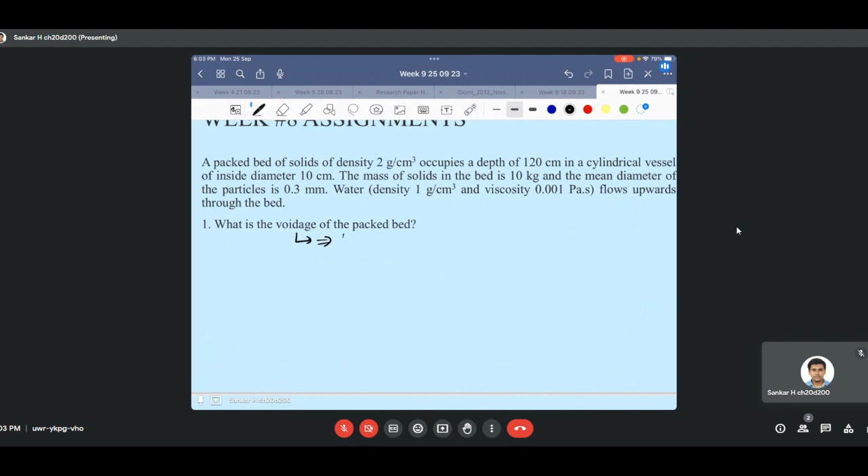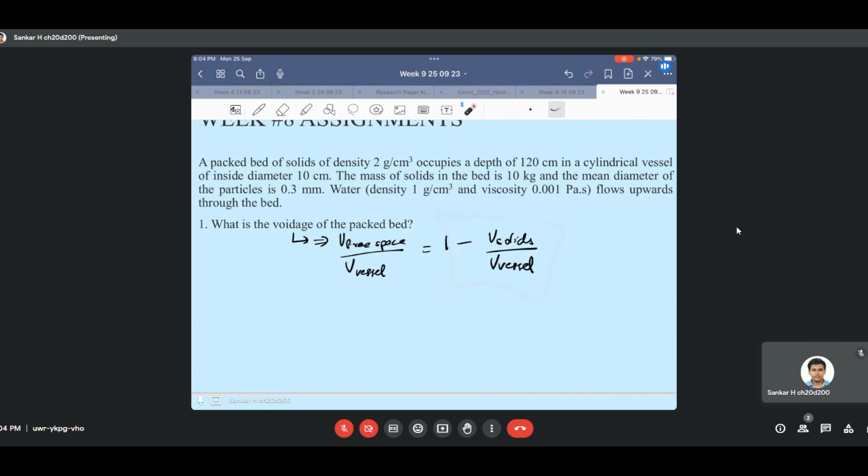The mass of solids in the bed is 10 kilogram and the mean diameter of the particles is 0.3 millimeter. Water flows upwards through the bed. What is the voidage of the packed bed? We need to understand what this term voidage means, and we know that it is the volume of free space divided by volume of the column or the vessel, and this is 1 minus the volume of solids by the volume of vessel. So we can find it using this simple formula what the voidage would be.

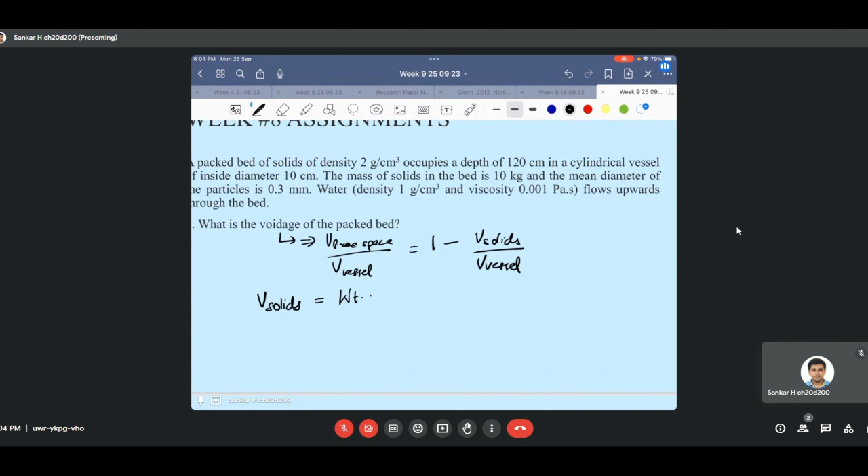And for finding the volume of solids, we have a simple formula which is given by the weight of solids to the density of solids. And the weight of solids is given as 10 kilogram, and the density of solids is given as 2 gram per centimeter cube, which is 2000 in SI units, kilogram per meter cube.

So let's take a look at the question. There is a packed bed and there are some solids in it, and these solids have a diameter of roughly 0.3 millimeter. These are in a vessel of diameter 10 centimeter at a depth of 120 centimeters, and we know that the fluid that comes out is water.

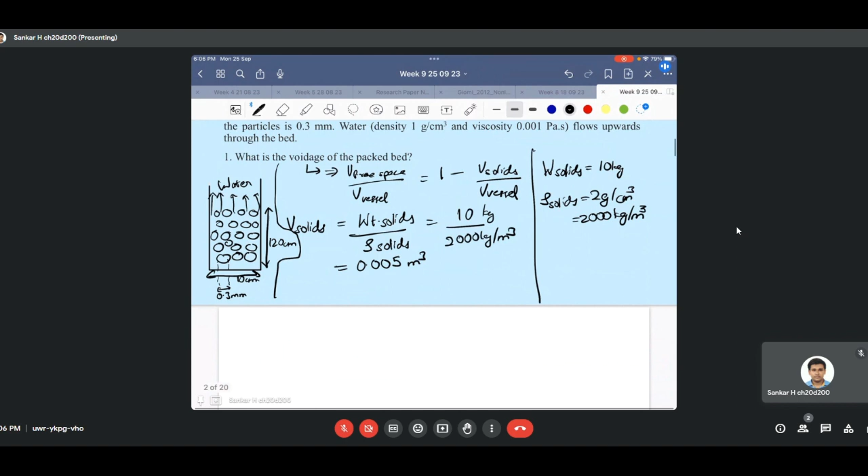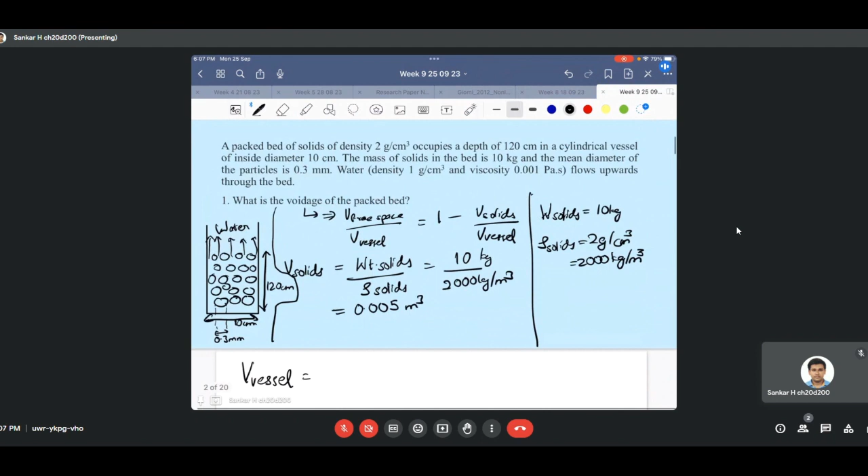Let's move on to the volume of the vessel. We know it is a cylindrical vessel as given in the question, so we can use the equation for calculation of the volume of a cylinder to find the volume of this vessel.

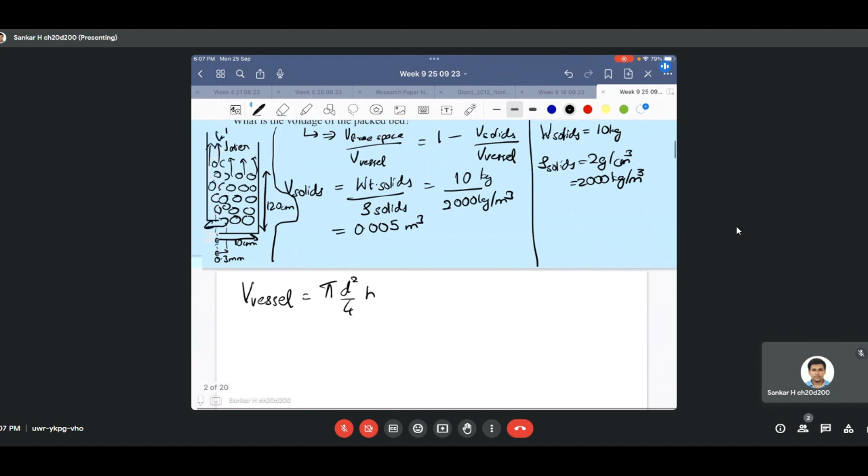The diameter of the vessel is given as 10 centimeters and the height as 120 centimeters. Converting to meters, that's 0.1 meter and 1.2 meter. Performing a simple calculation, pi times 0.1 squared by 4, times 1.2, we get the volume of the vessel.

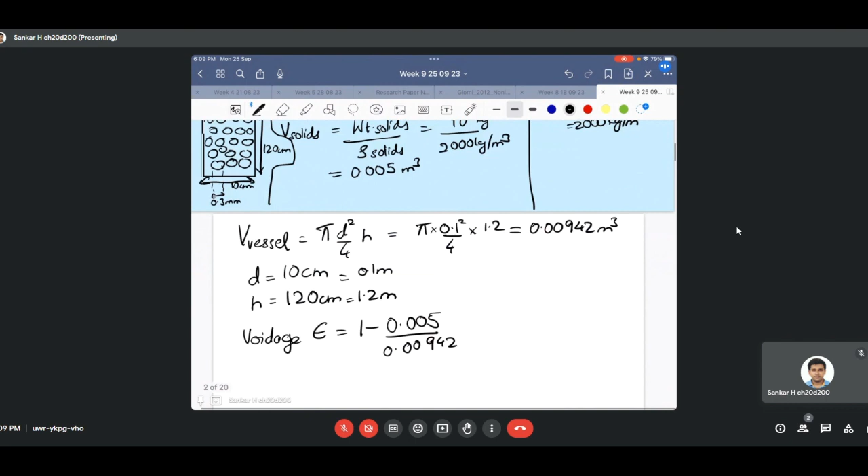We calculate the voidage, given by epsilon, as 1 minus 0.005 divided by 0.00942. It's just a substitution into the equation for epsilon, the voidage, and you get this as 0.47.

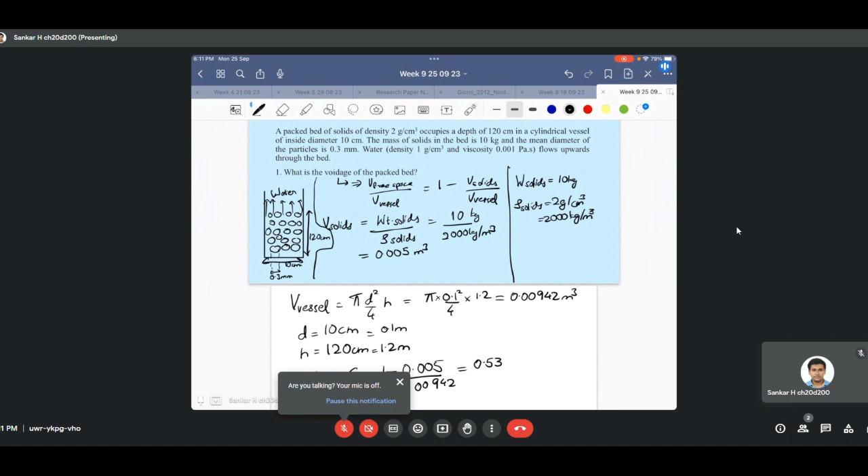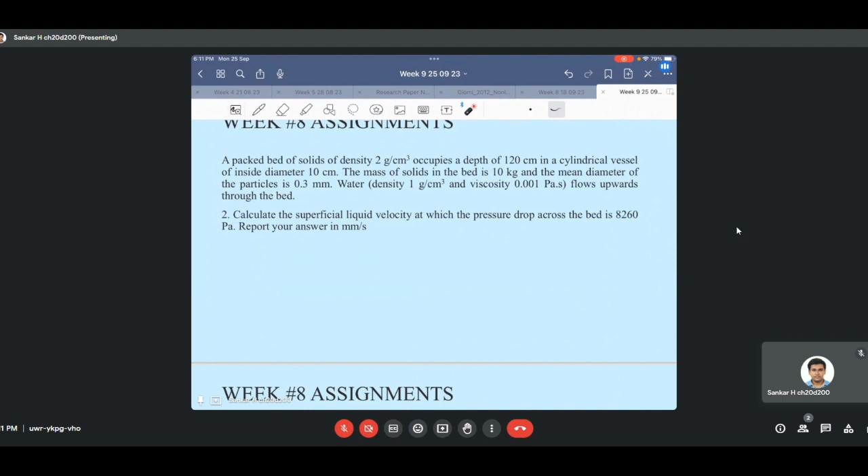Let's move on to the next question. The first part of the problem remains the same, with a packed bed of solids, and now we are required to calculate the superficial liquid velocity, where the pressure drop across the bed is 8260 Pascal.

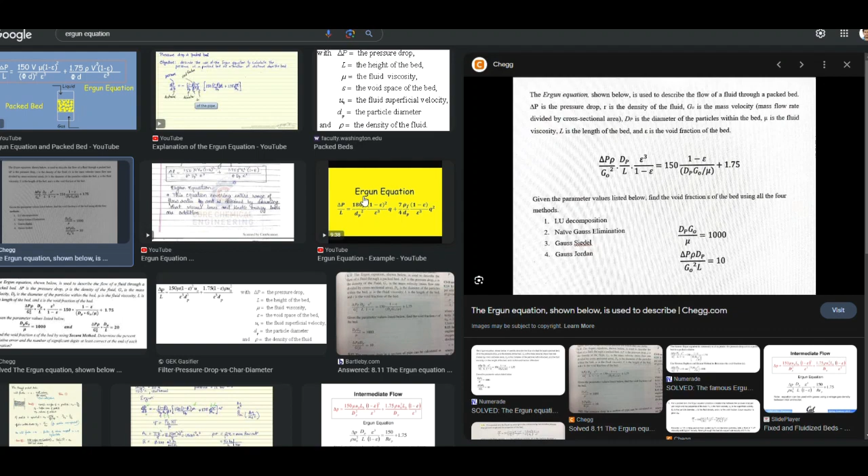For this we use the Ergun equation: delta P by L equals 150 mu times (1 minus epsilon) squared times V naught bar, divided by epsilon cubed times dp squared, plus 1.75 times (1 minus epsilon) times rho times V naught bar squared, divided by epsilon cubed times dp. This is known as the Ergun equation.

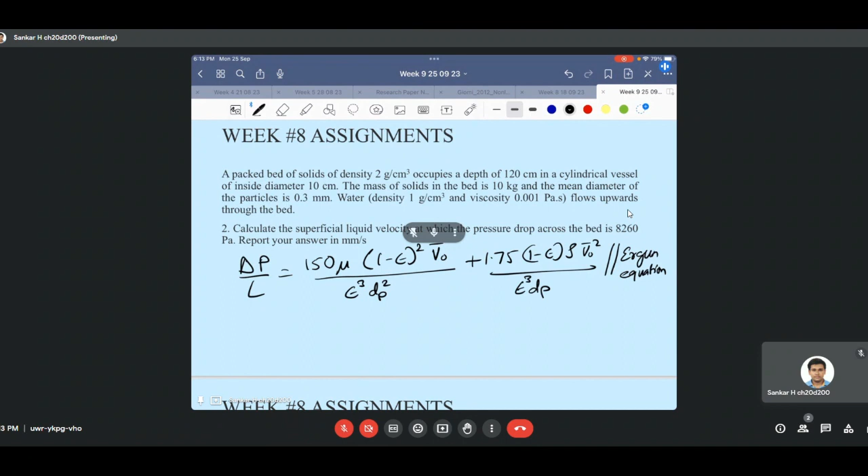I've noted it down here as well. This is a simple direct substitution of whatever we found till now. We just have to solve for V bar. The pressure drop across the bed is 8260, and L refers to the depth or height of the cylindrical vessel. Let's write everything down.

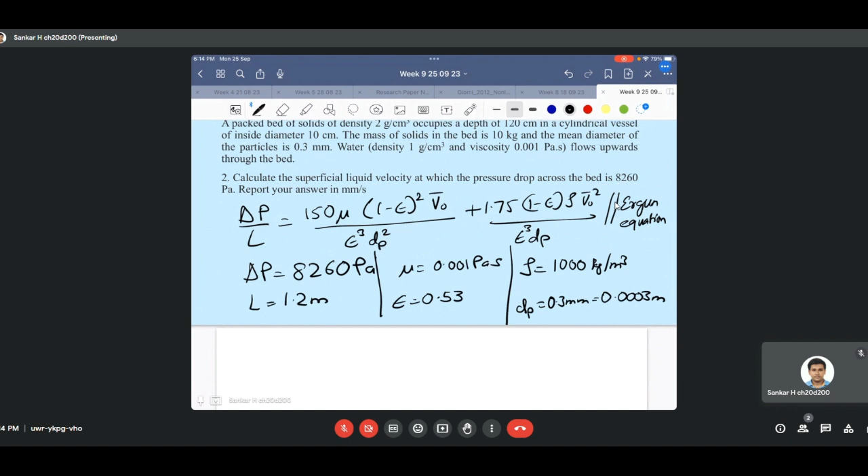Delta P is 8260 Pascal. L is the height, which is 1.2 meter. Viscosity of the fluid is 0.001 Pascal second. Epsilon we found to be 0.47. Density of the fluid is 1000 kilogram per meter cube since it is water. The diameter of the particles is 0.3 millimeters, which is 0.0003 meters. What we have to do is substitute here, which is done as follows.

I'll substitute along with the units so there's no confusion. 8260 Pascal, 1.2 meters, equals 150 times 10 to the minus 3 Pascal second, times (1 minus 0.47) squared, times V naught bar, divided by epsilon 0.47 cubed times dp 0.0003 squared, plus 1.75 times (1 minus 0.47) times 1000 kilogram per meter cube, times V naught bar squared, divided by epsilon cubed times dp.

Now we just have to solve this quadratic equation in terms of V naught bar, which I have defined as the superficial velocity.

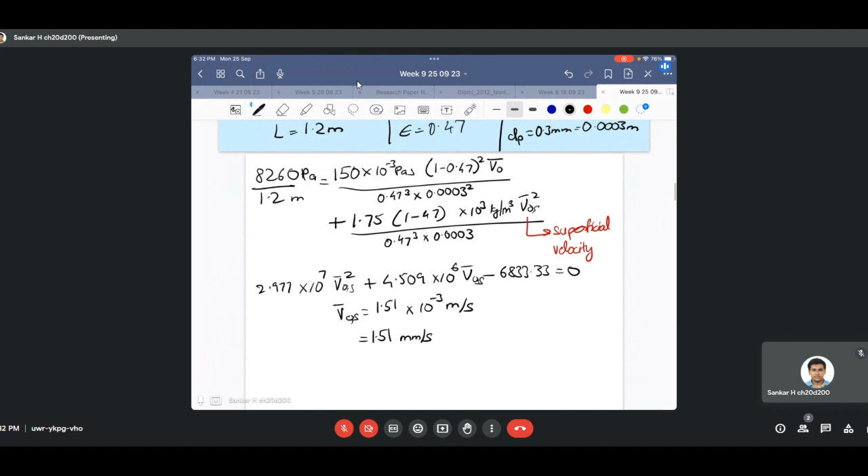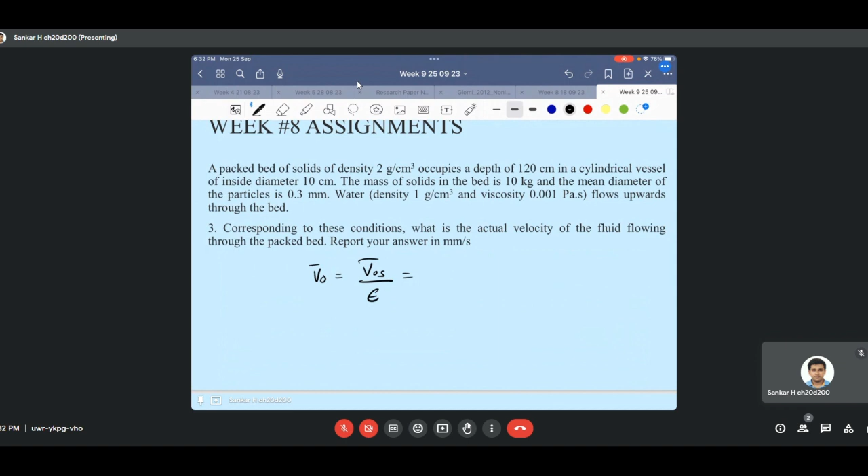The actual velocity, given by V naught, is equal to V naught S by epsilon, where epsilon is the voidage and V naught S is the superficial velocity, which is 1.51 millimeter per second, divided by 0.47. You can calculate this value, it will be 3.2 millimeter per second.

This will be the actual velocity. You should always know that the actual velocity will always be more than the superficial velocity, so this answer would be correct.

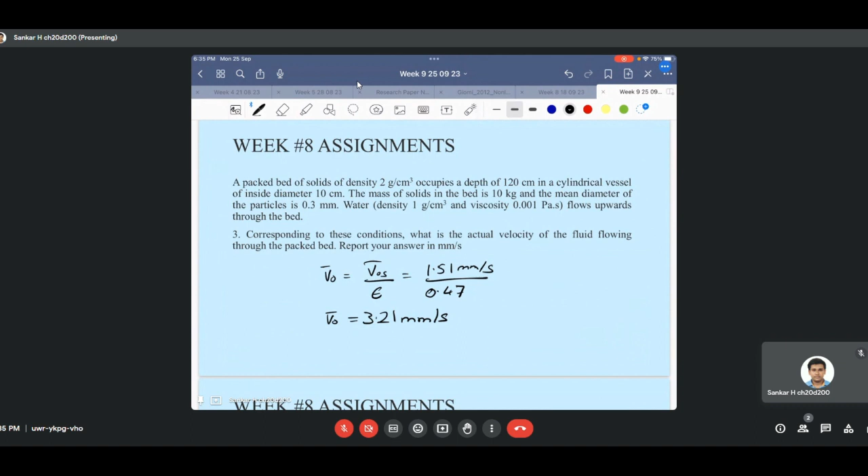Okay, let's move on to question number 4. A leaf filter has an area of 1.73 meters square and operates at a constant pressure drop of 300 kilopascal.

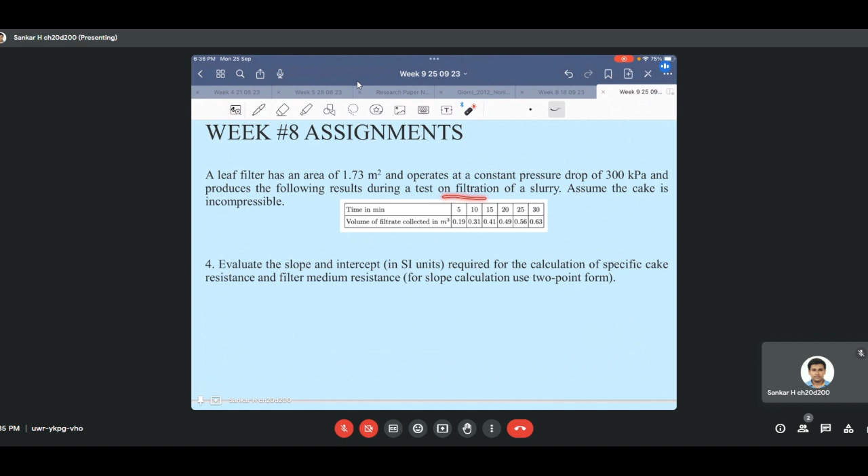The following results are obtained during a test run on a filtration of a slurry. Assume the cake is incompressible, and this is the time volume as a function of time data given in this table.

We have to first evaluate the slope and intercept required for the calculation of specific cake resistance and filter medium resistance. So first let's find out the slope, which is basically the 2-point formula, V2 minus V1 by T2 minus T1. You can take any V and any T for the calculation here. I'll show with two different ones.

Let us take first time difference of 5 and 10, and also with 5 and 30. So V2 minus V1, the 5 and 10 case would be 0.31 minus 0.19 divided by, this is in meter cube, divided by time in minutes, which is 10 minus 5 times 60 in seconds.

If we are using the first and the last point, we'll get 0.63 minus 0.19 divided by 30 minus 5 times 60.

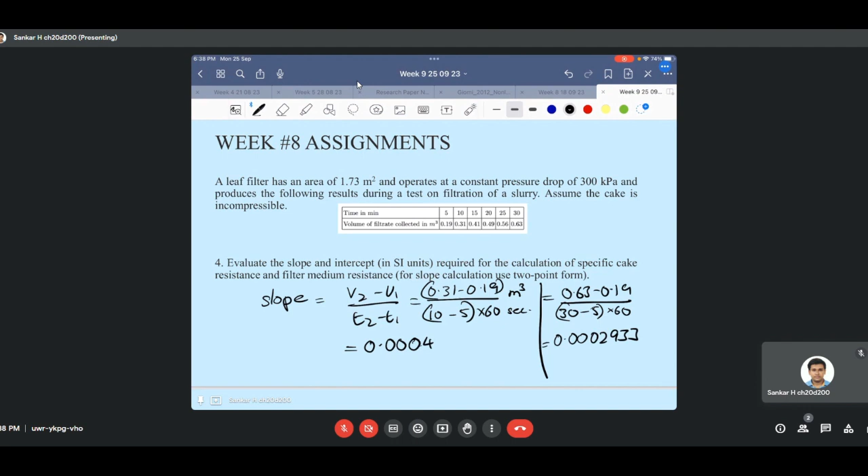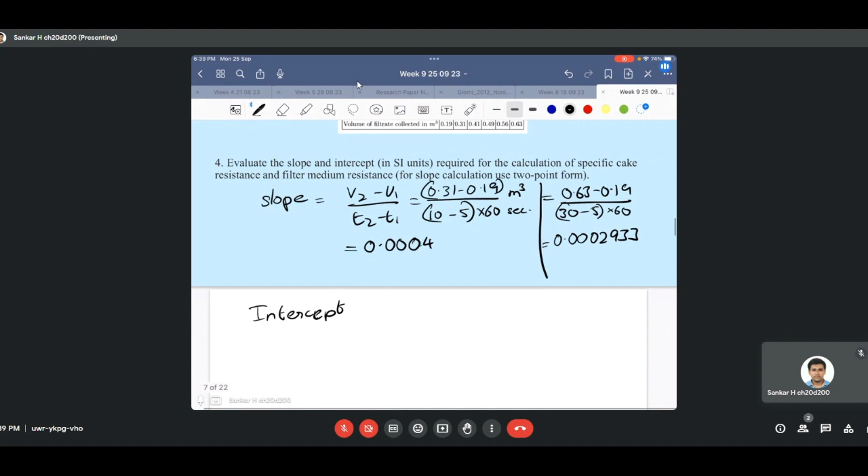And if you have to evaluate the intercepts, you just take a data set like 5 and 0.19, or 15, or 10 and 0.31. Take one data x and y, or one v and t, and then substitute the value of the slope over there. We'll stick with this value of slope for now, where 0.0004 is given.

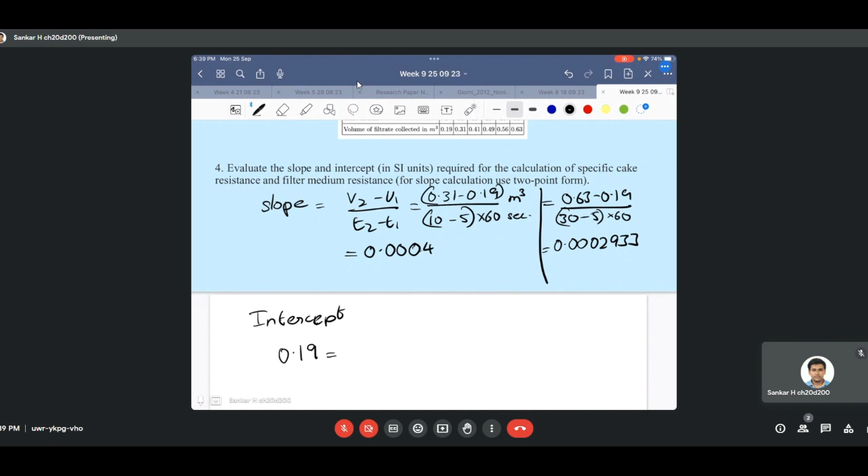So it is given that 0.19 meter cube is calculated as the y, and the slope is 0.0004 times the time value, which is 5 into 60 seconds, plus the intercept, which is the y equal to mx plus c formula, that is the slope intercept form. And the intercept will come out to be 0.007.

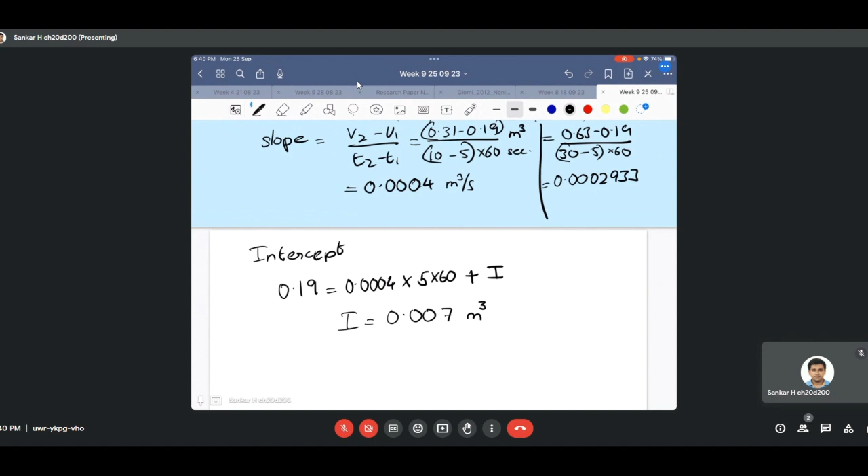The slope will have the unit of meter cube per second, whereas the intercept will have the unit of volume.

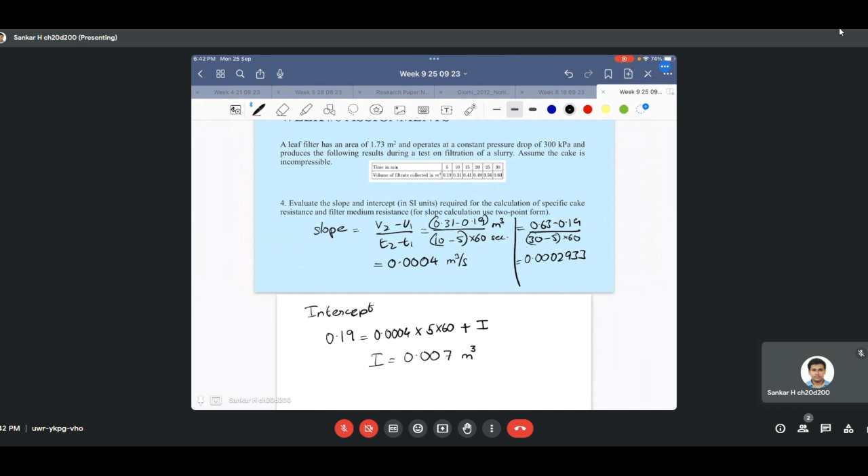Okay, we move on to the next question. We just need to calculate the time required to collect 1 meter cube of the filtrate of the same slurry at the constant pressure drop of 400 kilopascal. We have to report the answer in minutes.

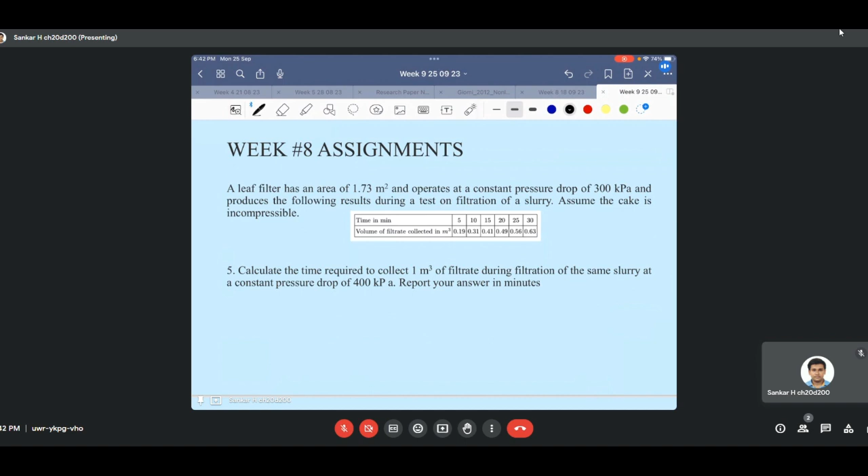Okay, there were a couple of mistakes, and I wish to redo this problem. We have to evaluate the slope and intercept required for the calculation of specific cake resistance and filter medium resistance. So we have to plot a function of t by V versus V.

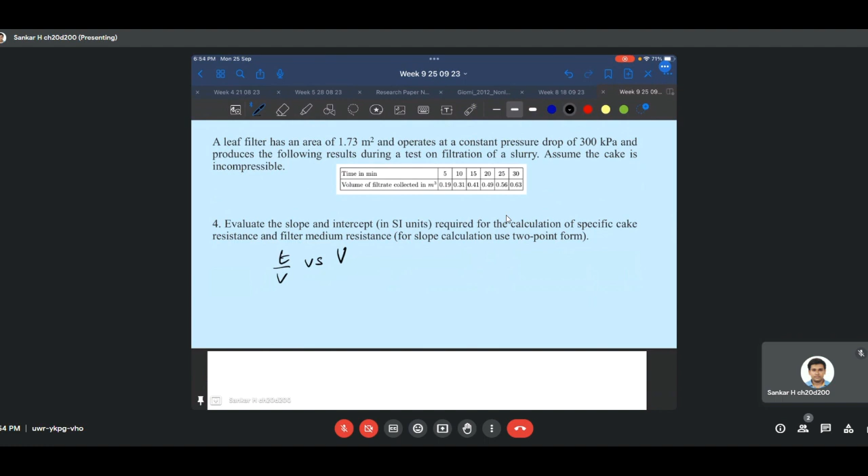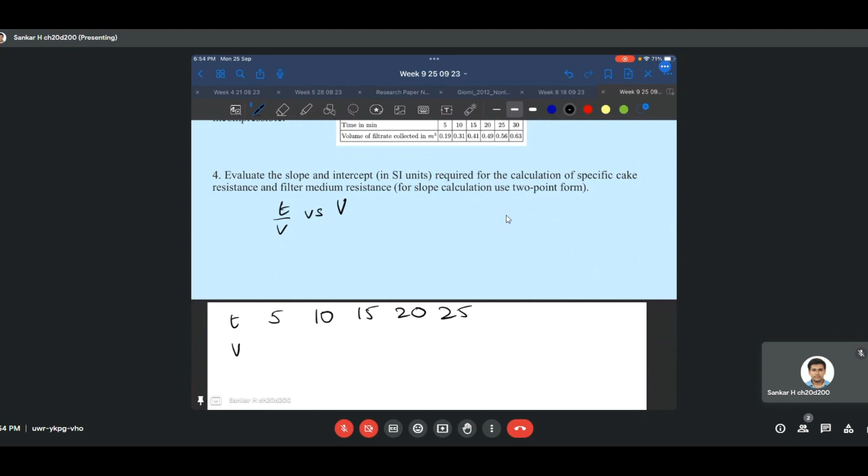Let us convert the data into t by V versus V, where the time and volume is given as follows. Time is given in minutes and volume is given in meter cube.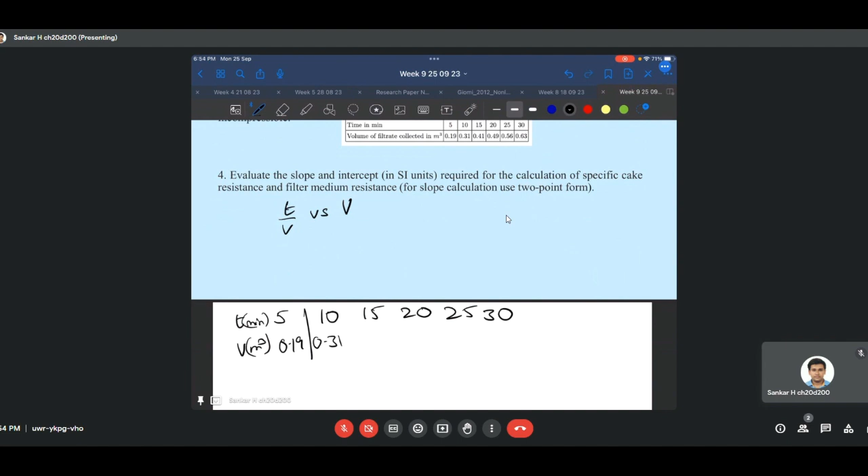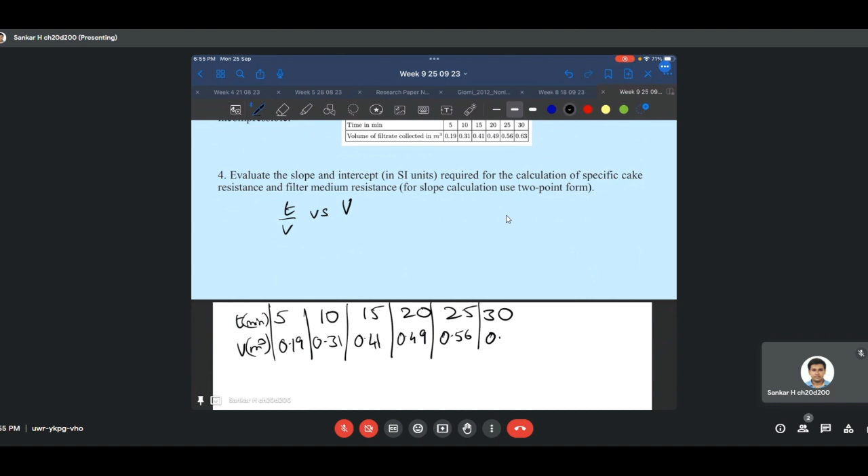So we have to plot T by V, and you have to plot that in seconds per meter cube so that it remains in SI units.

So I think I made a mistake here. I'm just redoing this along with you right now.

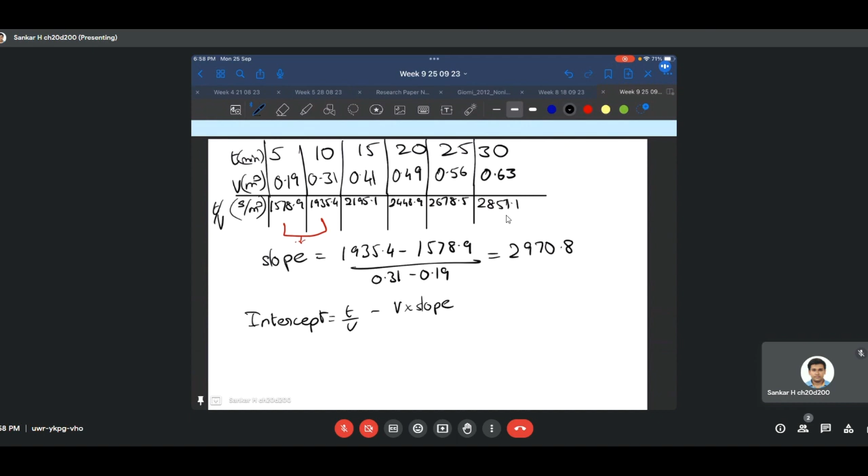Now if I have to calculate the intercept, I'll have to again just do the math over there, which is equal to T by V minus V times slope, and just substitute some particular value of T by V and corresponding value of V. Let me take the first point, so I'll get it as 1578.9 minus 0.19 times 2970.8, which will come out to be 1014.4.

So yeah, these are the values that I get for the slope and the intercept while calculating the specific cake resistance and filter medium resistance.

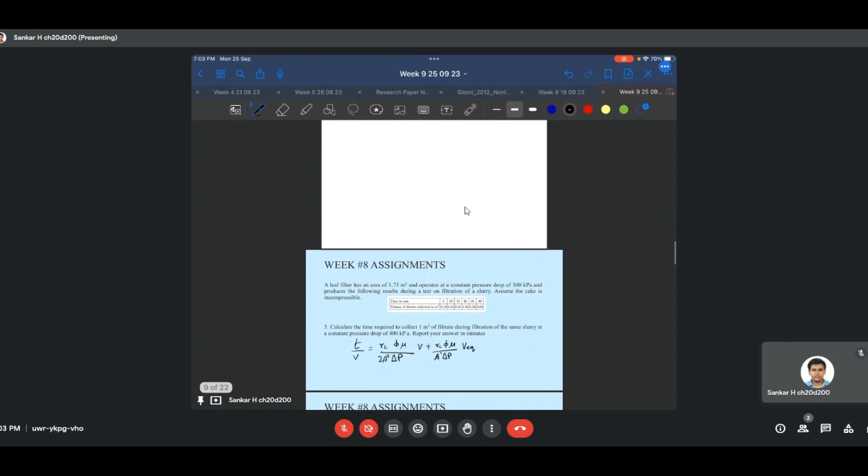Okay, we will move on to the next question, where we were supposed to calculate the time required to collect 1 meter cube of filtrate during filtration of the same slurry at a constant pressure drop of 400 kilopascal. You have to report the answer in minutes.

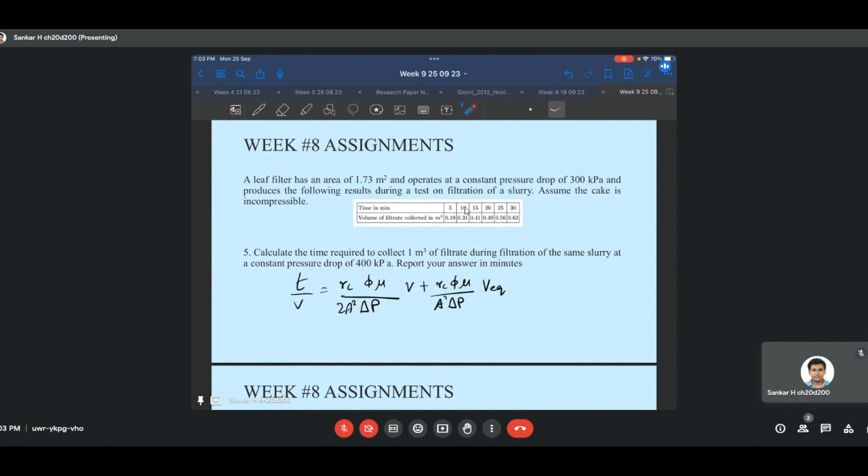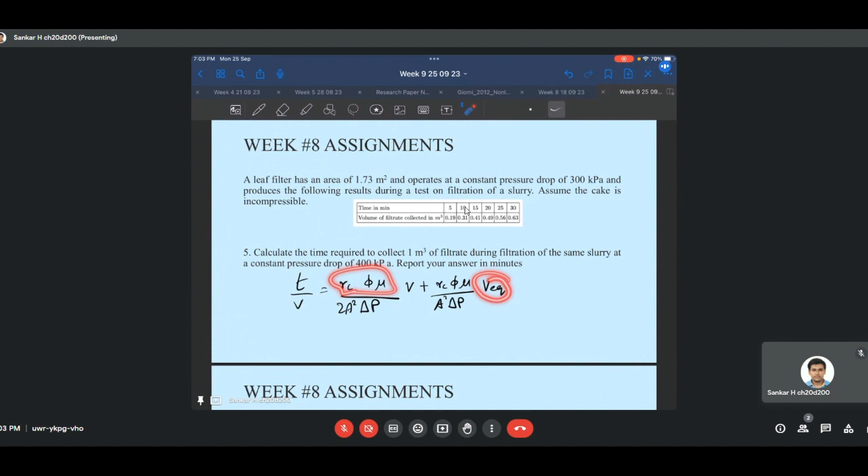You know that it is given as a constant pressure drop, which means it is a constant pressure filtration, and this is the formula associated with that, which is T by V plotted as a function of V. We get the slope and the intercept. We'll calculate various values like RC, phi, mu, and V equilibrium or VEQ, and then we find out the time required to get the 1 meter cube of the sample.

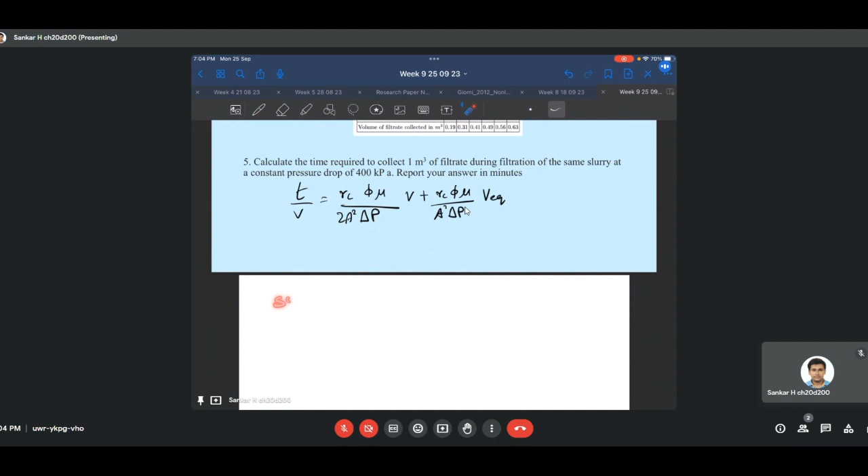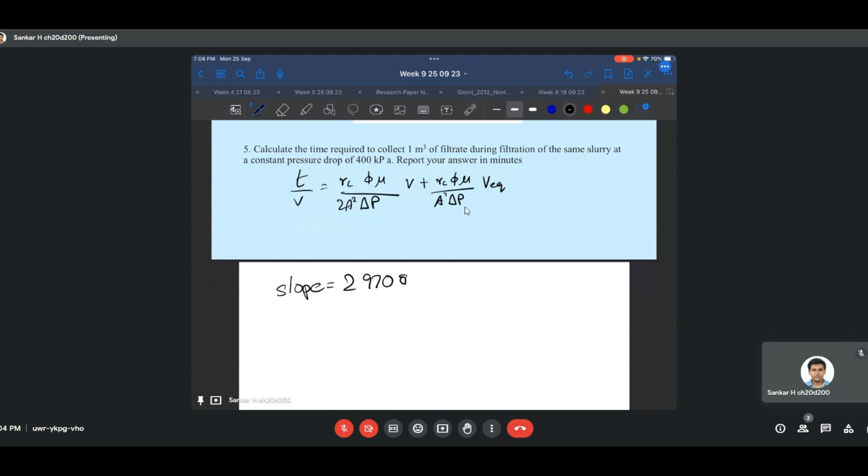Now let's do it together. So we know that the slope has a value of 2970.8, and this is equal to RC times phi times mu divided by 2a square delta p.

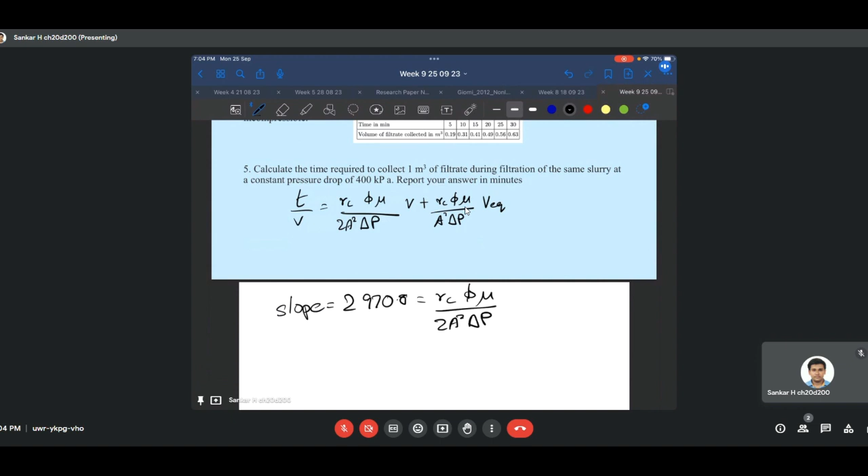And the area is given. These terms have been explained, I'm sure, in the lectures that are there on the NPTEL. So the area is given by 1.73 meters square. The pressure drop is given as 400 kilopascal, and based on this information we can calculate what is RC times phi times mu.

We'll get it as 2.055 into 10 raised to 9, in SI units.

So, sorry, this times 2, so this will be 4.11. Yeah, sorry about that. This would be 4.11 times... oh, just 1 second, I think I'm making a couple of mistakes here. Since I'm doing it along with you, I think I'm also involved in a couple of mistakes. This would be a square, so 7.113 into 10 raised to 9 in SI units. Here RC is the specific cake resistance, and all the other terms have been explained in the class.

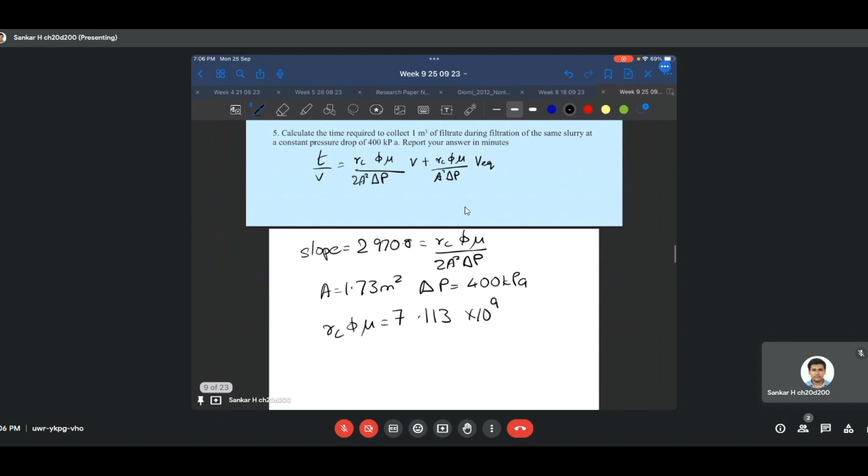Okay, then what do we have? We just have to find the intercept now, or find VEQ from the intercept. We know that the intercept has a value that we found out earlier to be equal to 1014.4, and that is equal to RC phi mu by a square delta p times VEQ. And from here we can find out this VEQ because we know the values of RC phi mu by a square delta p.

So let me just calculate the value for you. So from here we'll get V EQ as 0.1707.

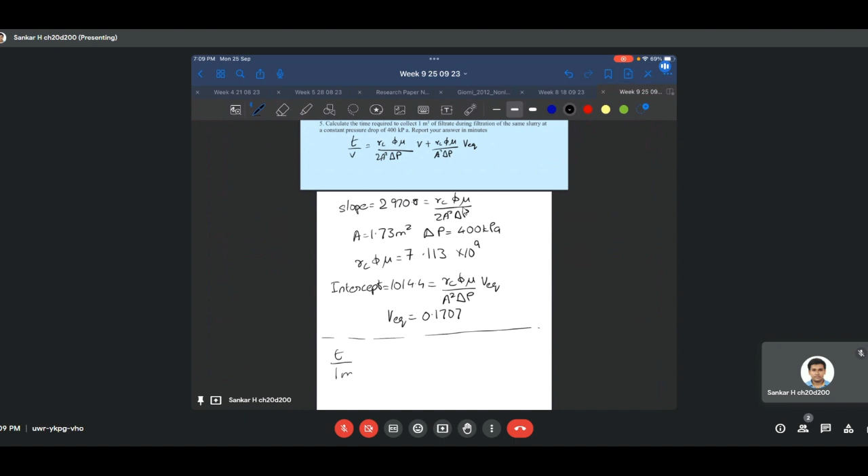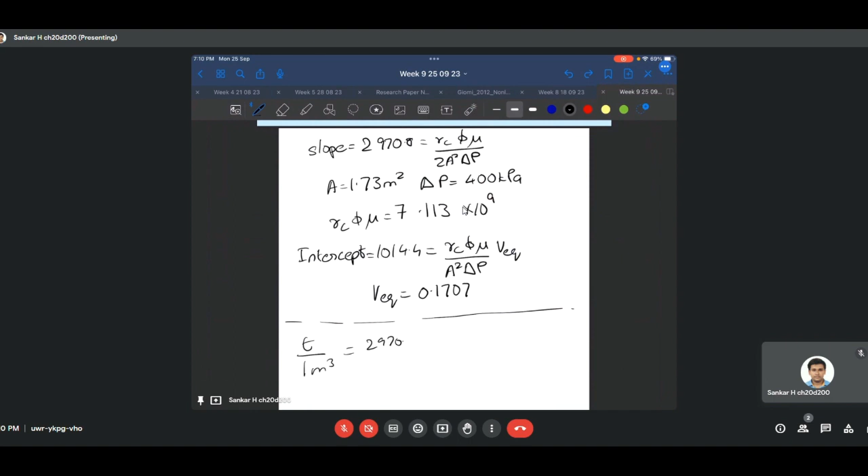Yeah, it's still not over, we have just the values now. Actually, we don't even have to do any of this. Now that I think about it, we can just substitute the time t to be found out for the time required for the collection of 1 meter cube as the slope, 2970.8, times 1 meter cube plus the intercept, that is 1014.4. And we'll get that as 66.4 minutes.

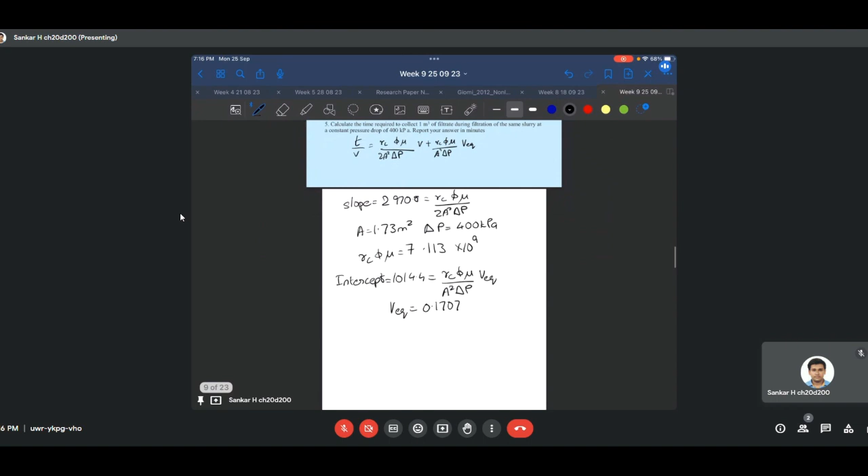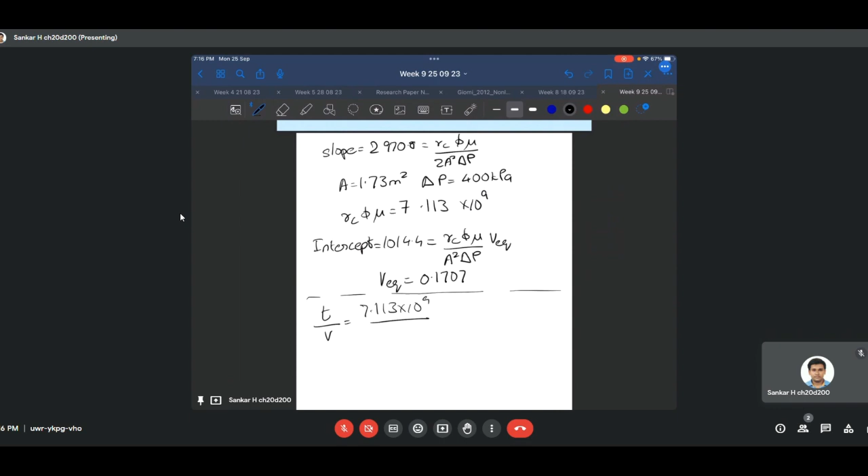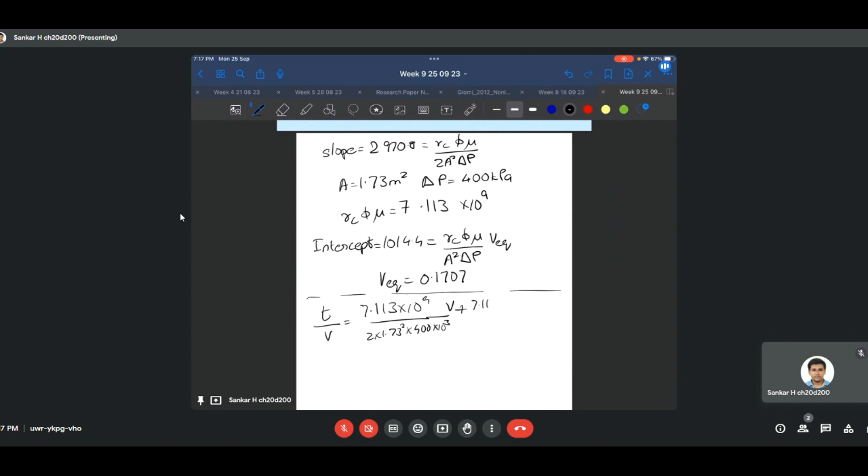Yeah, so I think again I don't think I made a mistake, but I'll just rewrite it. So if you are plotting the final equation as t by v as a function of v, you will get it as 7.113 into 10 raised to 9 upon 2 times 1.73 square times 400 into 10 raised to 3 times v, plus 7.113 into 10 raised to 9 by 1.73 square times 400 into 10 raised to 3 times 0.1707.

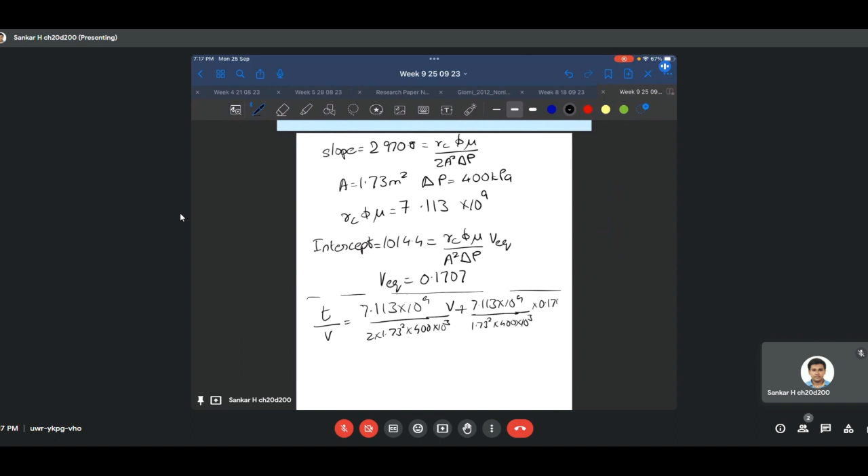And if you substitute for v equal to 1 meter cube, you'll get the time in seconds to be roughly 3985.2 seconds, and in minutes I'm getting it as 66.4 minutes.

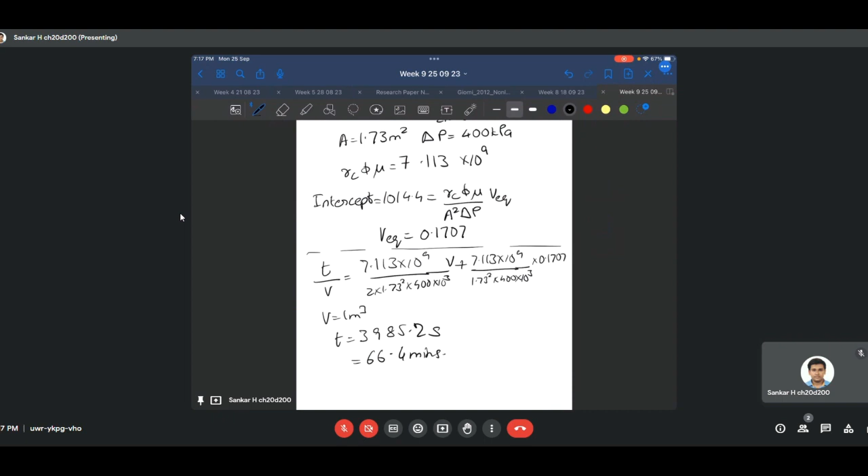I think this answer is not matching with the answer given in the portal or the NPTEL website. I think I may have made a mistake somewhere. I'm not sure what I have done wrong, but if I get to know the right answer, I'll immediately share it with you.

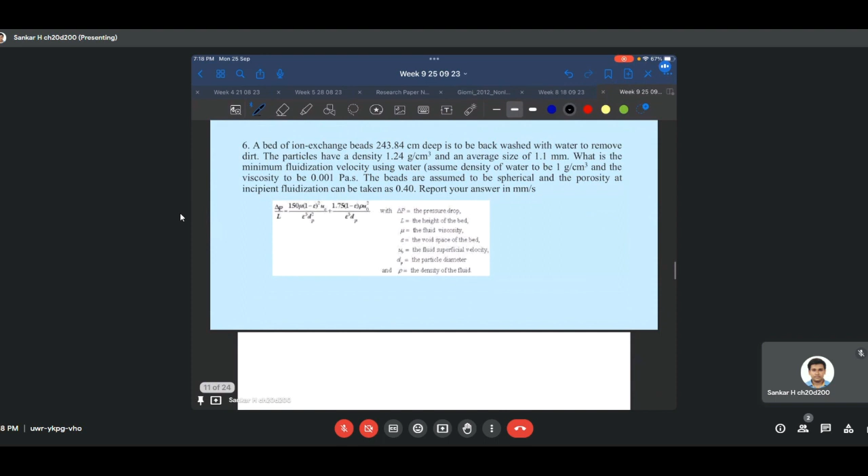Okay, let's move on to the next question. Before that, I'll give you a minute to read the question and think about it on your own. The next question is about a bed of ion exchange beads, 244 centimeters deep, to be backwashed with water to remove the dirt. The particles have a density of 1.24 gram per centimeter cube, average size of 1.1 millimeter. We have to figure out the minimum fluidization velocity using water, assuming water is 1 gram per centimeter cube dense and the viscosity of water is 0.001 pascal second, with the beads spherical and the porosity at incipient fluidization taken as 0.4. I'll give you a minute to think about it.

We know that it has to do with the famous Ergun equation, and we just need to figure out how to do it. I'll give you a couple of minutes to think about it before I give you the solution.

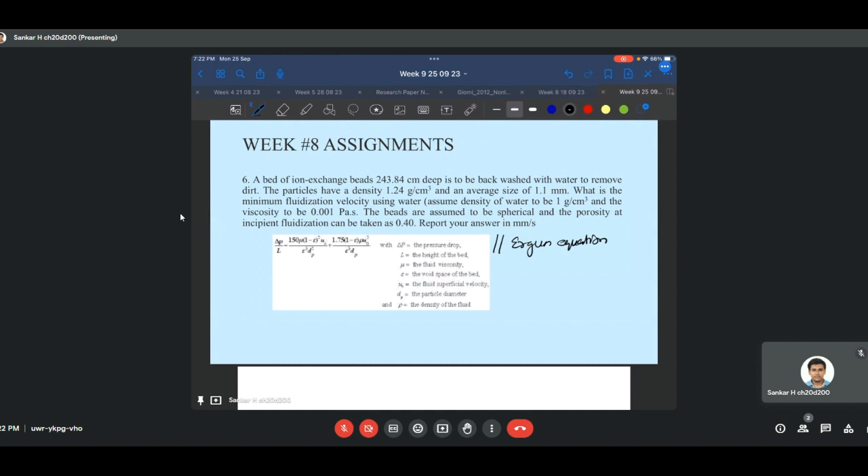Okay, so it's basically very straightforward, there's nothing to do here. All we have to do is find delta P by L. The rest of the values are given in the question. So let's write down what is given.

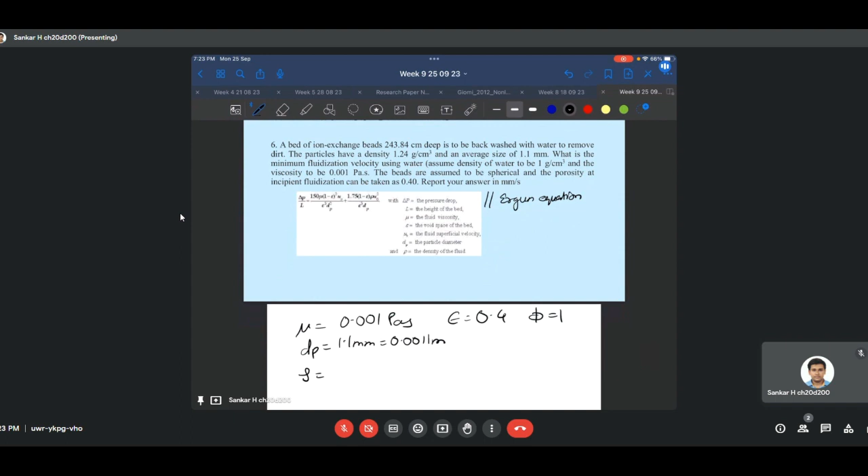The viscosity is 0.001 Pascal second. Epsilon, the porosity at incipient fluidization, is 0.4. The sphericity is assumed to be 1. The particle diameter is given as 1.1 millimeter, which is 0.0011 meter. We also have the density of the fluid, which is 1000 kilogram per meter cube. I think that's all what is required to solve in the Ergun equation.

All you have to understand is the pressure drop has to be calculated as, excuse me, the pressure drop in total has to be calculated as rho g h, that is rho p minus rho, times g, times L.

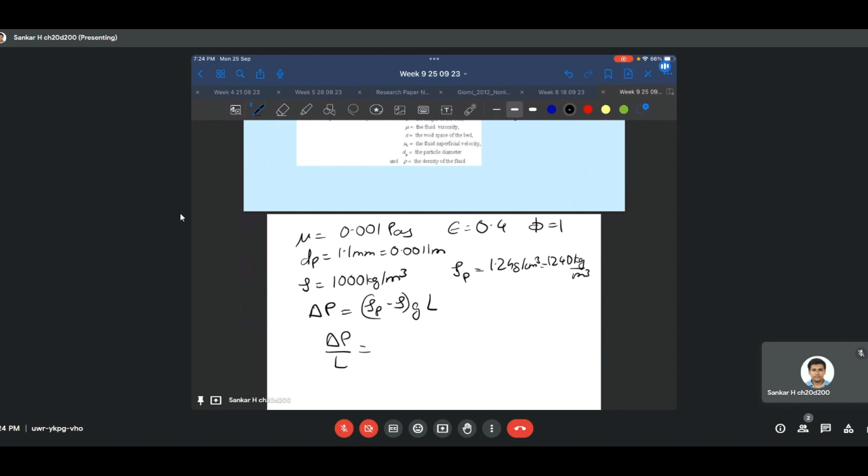Here rho p is given as 1.24 gram per centimeter cube, which is 1240 kilogram per meter cube. Therefore, if you find the pressure drop per unit length, you just need to find out rho p minus rho times g, which is coming out to be 240 times 9.81.

You'll get this value as 2354.4 pascals per meter. Now we just have to substitute and find out the values for the velocity. That's all we have to do.

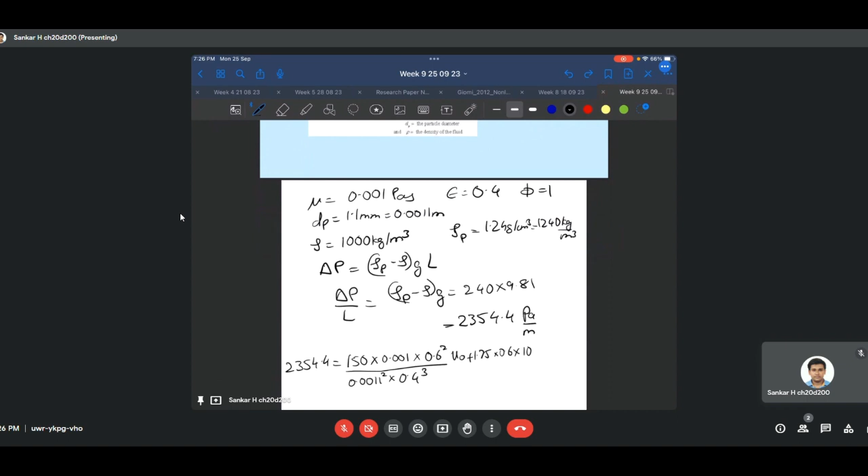We just need to solve this equation, and we'll get the velocity as 0.0104 meters per second.

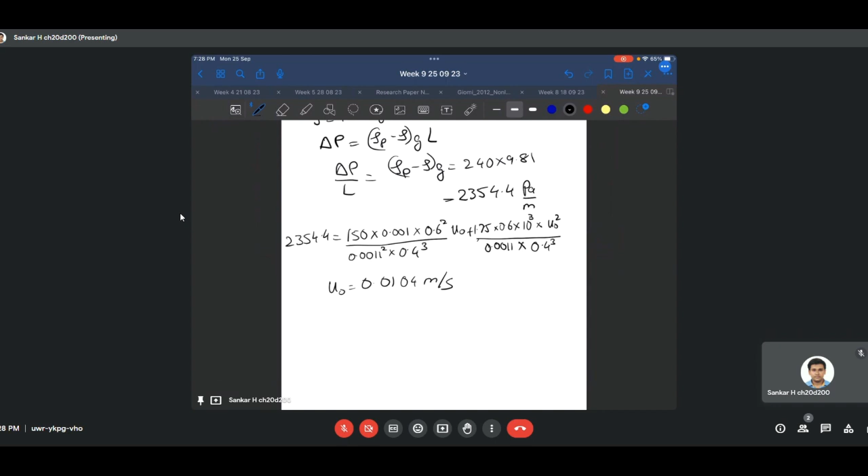I think I'll stop here. We have a lot of practice problems as well that I was planning to solve, but because of the time, I think I'll stop here. If you have any doubts, please let me know.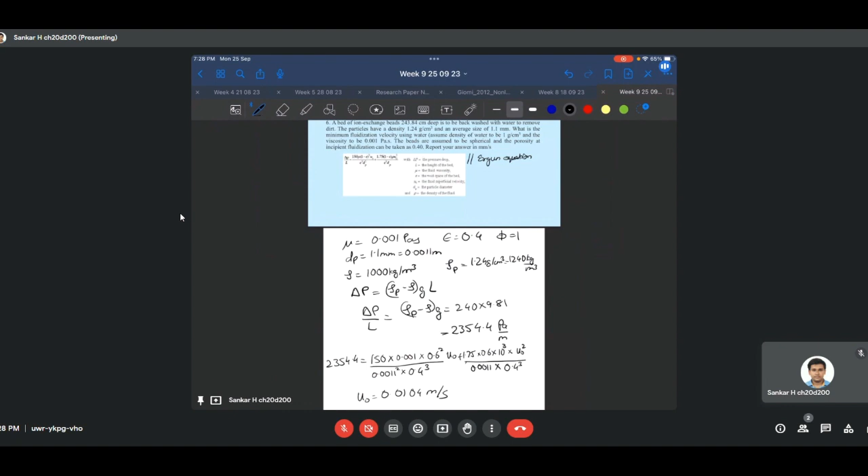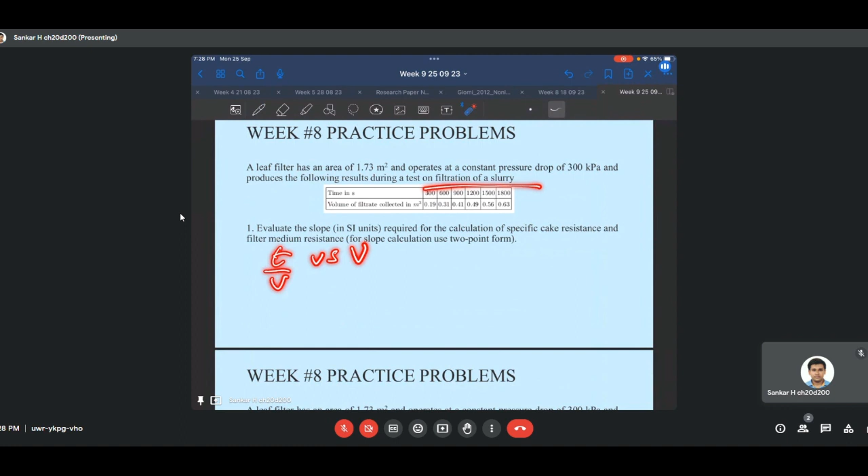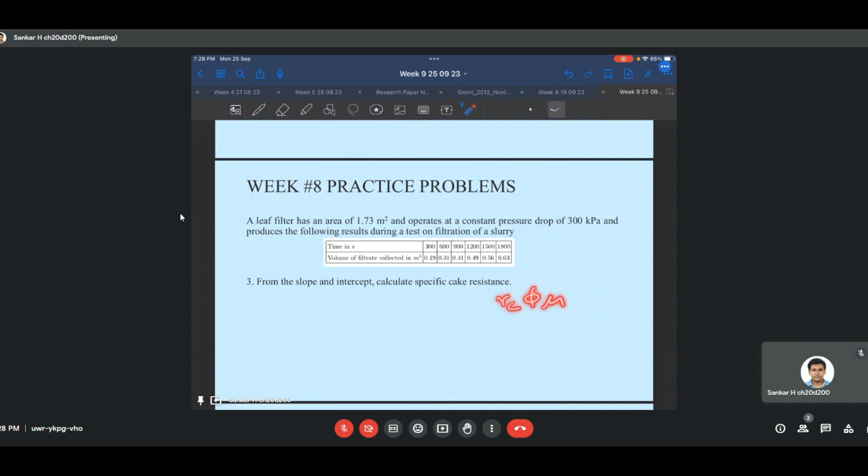We'll just do a couple of these. The first part of the practice problems from week 8 is basically the same as what we discussed here, where we have to plot T by V versus V. The only thing is that the data set has changed, so you can find the answer here. From the intercept, we have to specify the specific cake resistance, which can also be found out by rc times phi mu. That's all you have to do there.

Now let's move on to this match-the-following question, where we just have to find what matches with what. Where is the Ergun equation used is basically what has been asked, and the Ergun equation is used for a packed bed. So A3 would be the correct answer.

Now, where is Hagen-Poiseuille used? Hagen-Poiseuille is used for laminar flow through a tube. Therefore, the correct answer is option 1.

And the Bernoulli equation is basically an overall energy balance equation, and we can use that over there. The Stokes law is basically for a settling regime, or it's for a particle settling in a viscous fluid. So the correct answer for that is D6.